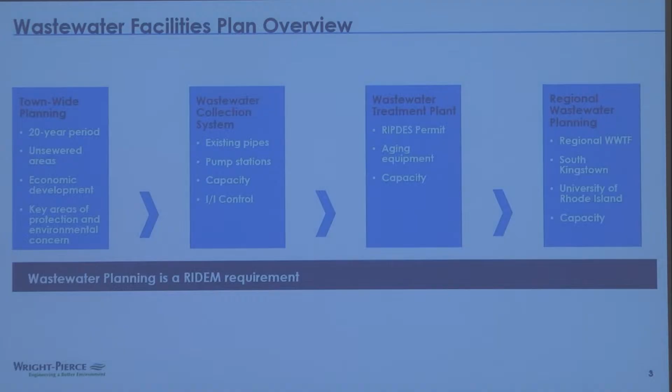The first part of the process is we look at your wastewater collection system. There are pipes, pump stations. We look at the capacity. We look at inflow and infiltration - that's water getting to your sewer system that shouldn't be, either from sump pumps and things like that, or from groundwater infiltration.

We looked at your wastewater treatment plant on Ocean Road by Scarborough Beach. That has a permit governed by Rhode Island DEM. We looked at compliance with that permit, whether the plant's ability to meet that compliance, and whether it had enough capacity for your needs now and for your needs in the future.

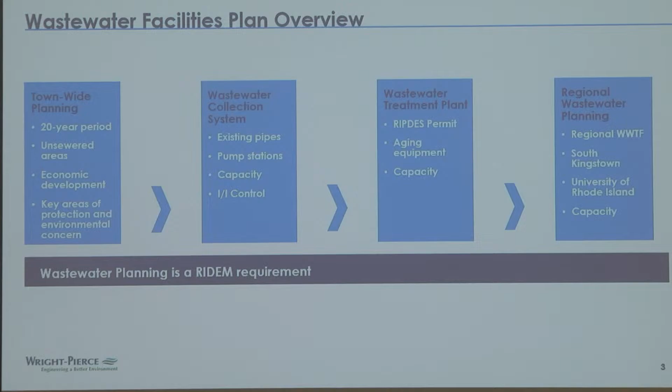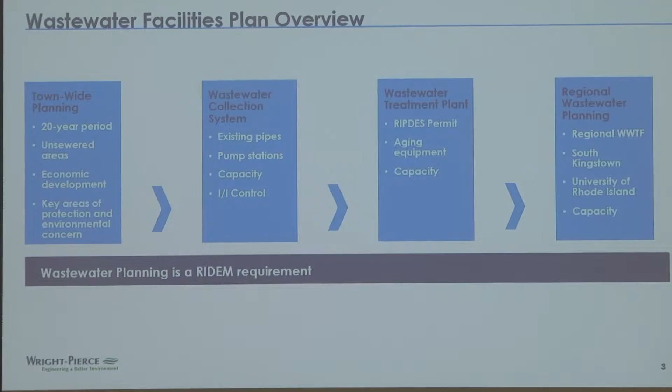And then finally, we looked at your regional wastewater plant. The regional wastewater plant is located in Narragansett, but it's owned by South Kingstown, and it's shared by 3 regional partners: Narragansett, South Kingstown, and the University of Rhode Island. So we did review the capacity of that plant.

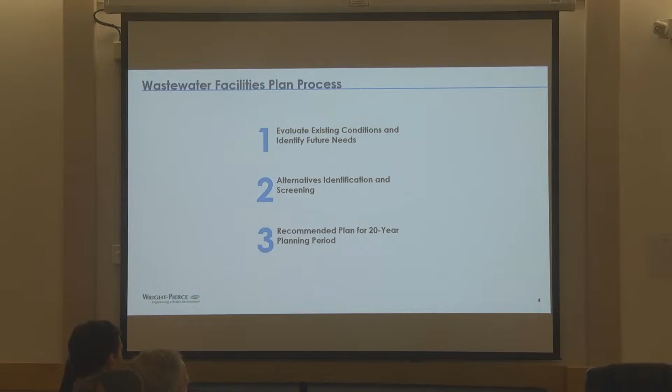The basic process here is we evaluate the existing conditions and identify your needs for the future - how much you might be okay at year 1, but you might need a certain additional capacity by year 20. We looked at alternatives to meet those needs, and then we have a recommended 20-year plan.

So first we'll look at the existing conditions. Next slide. To look at your wastewater needs.

John, before you go ahead - doing these updates, is this required by the state, or is this something we just, as a planning board or engineering, just make up?

It is required by the state. What are the ramifications if you don't do this? Well, one thing is, if you don't have projects within the facility plan, then you cannot go for any financing through RIDEM, through the infrastructure bank. That's one of the things. And it's really part of RIDEM's approach - as you bring forward different types of projects, any upgrades at the plant go through an order of approval stage with them as well. But really, it is a requirement, and there's some financial implications by not doing that.

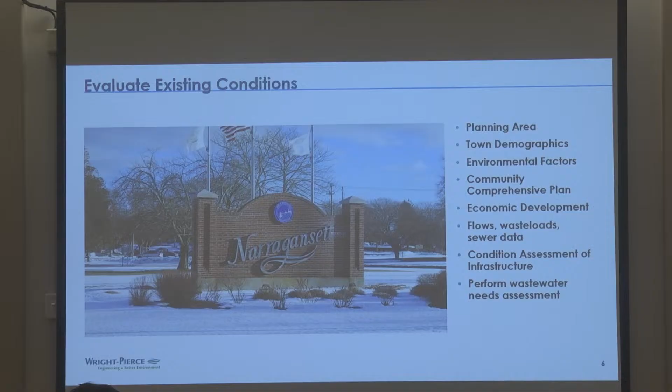And then we looked at a whole bunch of operating data from your wastewater plants - the flows coming in, the waste loads coming in - and then we projected those waste loads for the projected increase in population, for projected development in town, for the potential. Another factor in this was...

investigating the potential of expanding fish processing at the Port of Galilee. Historically, there was additional fish processing there, an economic boon to the town, and the wastewater facilities are one of the limiting factors for that industry.

That sign was from Narragansett beer. Go back 2, I think.

So the town's collection system - you actually have 2 collection systems. The north part of town flows to the regional wastewater treatment plant. There's about 14 town-owned pump stations, some additional private pump stations, 2 major sewer interceptors, and this area of town roughly coincides with your planning districts, the north and the central planning districts.

The south part of town, the collection system there flows to the Scarborough wastewater treatment plant. There's, I believe, 5 or 6 pump stations in that area. Again, 2 interceptors, and yes, all flow there goes to the Scarborough treatment plant. That system is owned completely by the town.

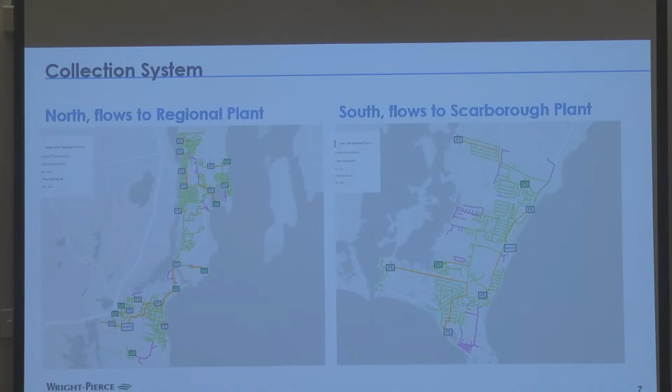I'm going to interrupt, I'm sorry to interrupt. So we keep talking about Scarborough - thinking of somebody at home, where is the regional plant located? The regional plant is on Westmoreland Street, up near Stop and Shop, behind Mariner Square. The other question is the age of the infrastructure in the north and the age of the infrastructure in the south, especially pipes.

The Scarborough treatment plant was built in 1982. The regional plant was built in the mid-70s. So John, you may be able to know a little better. Are the sewers older than that, or?

Yeah, definitely in some of the center areas of town, down near the pier, there are some older systems. There's some pipes that are probably pre-1900 down there. Not a lot. A lot of the systems were built with initial construction, then there was some work in the 40s that replaced a lot of that stuff. Then in the 80s and 90s there were major upgrades, so a lot of it's been replaced. But most of the sewer systems could be on the order of 40 or 50 years old.

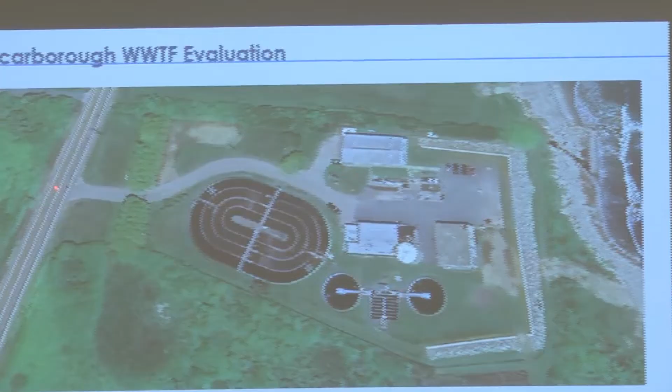And here is the Scarborough wastewater treatment plant. I'm going to walk you through the treatment process here. So flow will come from the sewer in the street. The service comes in, the sewer service to the plant flows in and goes to this area right here - this is the headworks, we call it. And this has some screening and some grit removal equipment, so we get rid of any debris or grit that's in the system before it gets to its main treatment process. Then we go to the influent pump station.

This is a lift station. This pump station will push flow up to this right here - this is the heart of your treatment process. This is an oxidation ditch. So what happens here is there are bacteria that live in this system. We call it mixed liquor, and that bacteria is what actually treats the biochemical oxygen demand that we're trying to get rid of to release clean water into the ocean. So the flow will come in here, go around these concentric rings, and that gives it enough time of treatment. Then in the middle, it flows over a little weir and then flows to these tanks right here.

These are called the secondary clarifiers. In these tanks, all the solids that have been treated settle to the bottom, and they're pumped and disposed of. The clean water flows over the top of these tanks, over a weir, and goes to this tank right here, which is your disinfection tank. Here the flow is treated with chlorine to get rid of any bacteria, and then it's actually dechlorinated before it goes out to where it's discharged out to Rhode Island Sound. Now the solids I mentioned are collected in a tank as sludge, and there's a process in this building where we dewater that sludge - basically we pull some water out of it so that a truck can come and haul the dewatered sludge away to a disposal facility.

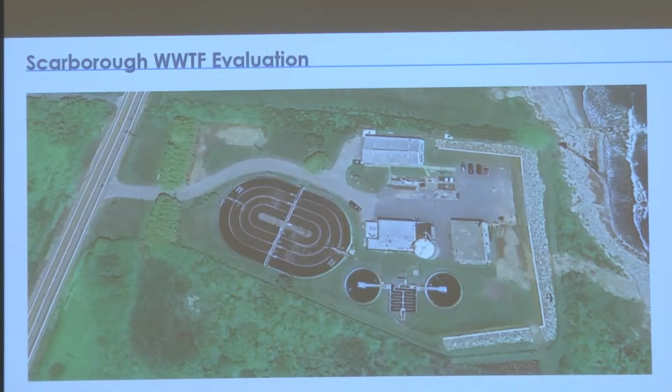Yeah, the berm was constructed, I believe, in 2017. It was constructed to elevation 20, I believe. The flood elevation at the plant, as it currently stands, is 19 or 17, and I would have to check what sea level rise is, but we are in the process of doing a resiliency plan, which is also required by DEM. The berm does protect the treatment plant sufficiently from that standpoint. So everything behind the berm is protected.

And even at that time we got the map modification, LOMR, for the area, because it's a little postage stamp carved out of the actual floodplain, and the ocean flooding area is protected by the berm there. So our insurance rates are reduced for the facility. So the berm is in place and still functional. Thank you.

In fact, another piece of that we just completed - to the right of this picture there's the outfall. There was a rock jetty constructed there called a groin, and we reconstructed and rebuilt that just this past year and a half. So that's an additional measure to provide resiliency to the plant itself.

So when we evaluated the treatment plant, again, this was built in 1982, and there have been some equipment replacement along the way. But the plant as a whole, what we found was a lot of the equipment was aging. The picture on the left is showing the pumps in the influent pump station.

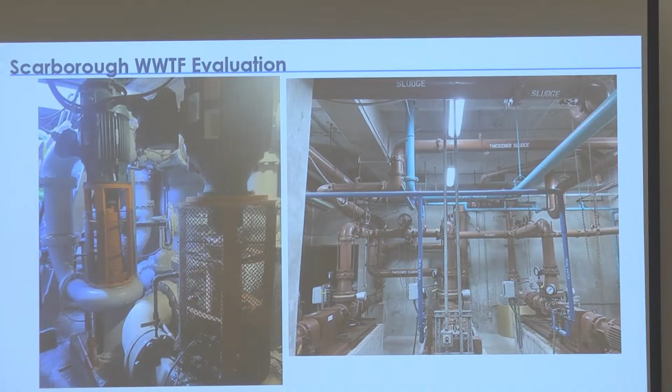The picture on the right here is showing the sludge pumps, which transfer the sludge from the treatment process to the holding tank and to the truck for disposal. Next slide.

This slide on the left shows the oxidation ditch, which is the main treatment process. You see the blue motors here. These are actually blowers and mixers, and what they do is inject air into the tank, and that air supply is critical for the bacteria to successfully treat the sewage.

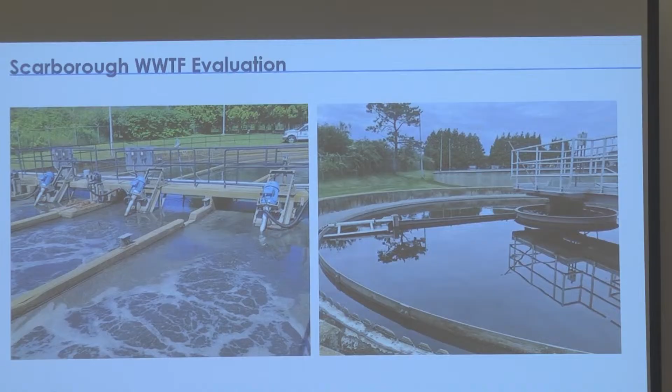On the right, we show the settling tank. This is the weir that the clean water flows over. And what we found with your treatment process is for your existing flow rates right now, this process is undersized to treat those peak summer seasons. I will say your operators work hard, and they've done, I guess, yeoman's work to keep this plant meeting what it does, but it is in need of a capacity increase, which we'll discuss more shortly.

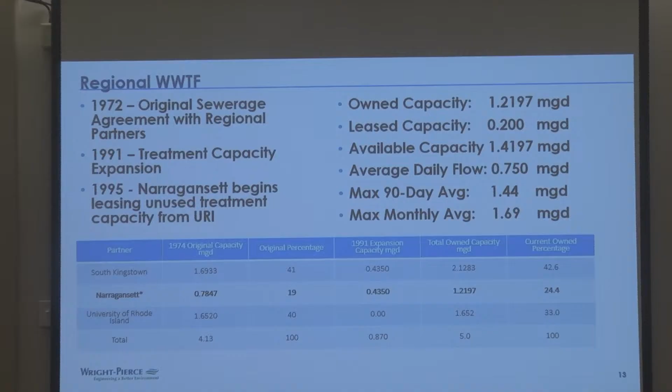All right, now the existing conditions at your regional plant, the history of your regional plant. In 1972 was the original agreement. In that original agreement, Narragansett owned 19% of the plant, which was 0.78 MGD, or million gallons per day, or 784,000 gallons per day was what they were allotted. That was not enough for the town at the time.

In 1991 was the first capacity expansion, and that was shared by South Kingstown and Narragansett. So that gave Narragansett an additional 430,000 gallons per day. So the current capacity of that plant that you own is 1.2 million gallons per day, or 24% of the plant.

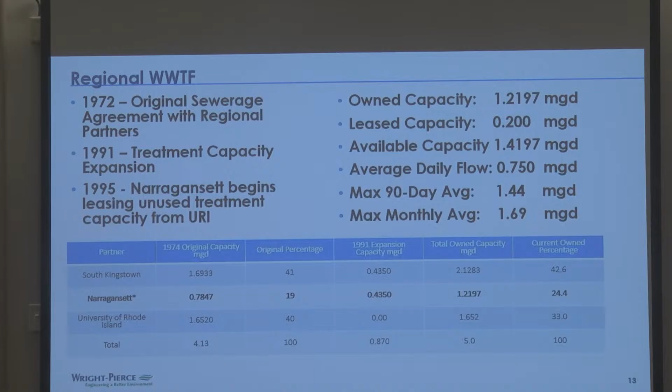In the time since then— got a question. Yeah. Hindsight is very clear, isn't it? Why did we choose 19%? It just seems like a low percentage of the entire capacity. Was it that we were saving money, they were going to pay more to build it, or do you know the politics? No, I don't have any idea.

I know that the earliest planning documents I saw date back to 1965, some McGuire engineering reports. It's just the way they divvied up and projected the flows from the areas. I've made the comments when discussing it with URI and SK that right from the get-go, we'd never had enough. Because we built the plant in '72, or the agreements were in '72, the plant came online in '78, '79, and then within 12 years, by 1990, we were already way over what we were allotted. So the planning documents just weren't accurate for whatever reason. I don't know if it was political decisions or whether the planning was limited to a specific area for some reason, or they just never expected the north end to expand as much as it had. I don't think you can blame the planning board, but I don't know.

Okay, Tom, go ahead. No, you go. So you've used the language a couple times saying that South Kingstown owns the plant, and then you just said Narragansett owns capacity. My understanding is this was authorized by a special act of the General Assembly, and who financed the construction of the plant? The capital cost of the plant was at the percentages. Shared. Was shared, right. Yes.

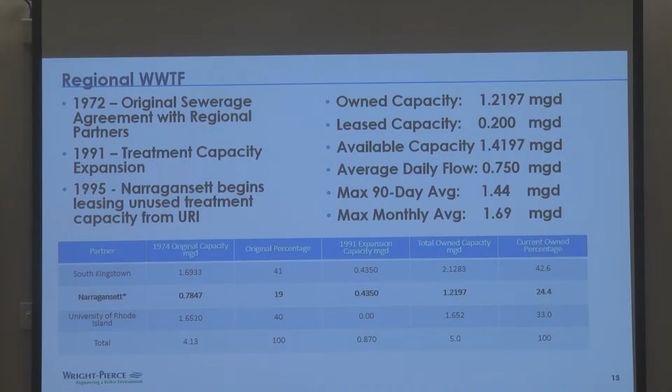There's a max day that's more, but that's a different aspect of it. That's where we're shortfalling, and the plant design and permits would all be based on that max month. It's rare that you have an average day, because it's an average—it's basically averaging a lot of up and down over the course of a period of time.

Yes. So here's the question: what do you know? Do you have a number for what the minimum 30-day flow is? I do, actually. I wrote it down if I brought the right paper here. It's well, I know it's about 60% of the average day, about 65%. So that's okay, 2/3 of that would be like point... I'm an engineer, I'm not good at math in my head, though.

0.6, something like that. In absent frozen ground and a storm, would you expect that month to be December, January? I would probably, yeah, or November or March, the cooler, drier months. Yep, I would expect December, January, just based on occupancy.

I have two questions before we leave this slide. One, in the new negotiations with the university, if they, in their strategic plan, in the back of their head, are looking to expand housing on campus, which they've talked about doing, there's nothing in the agreements to say that they can take back capacity from us. Obviously we're set for this contract, but in the new one, they could reduce our share based on their need.

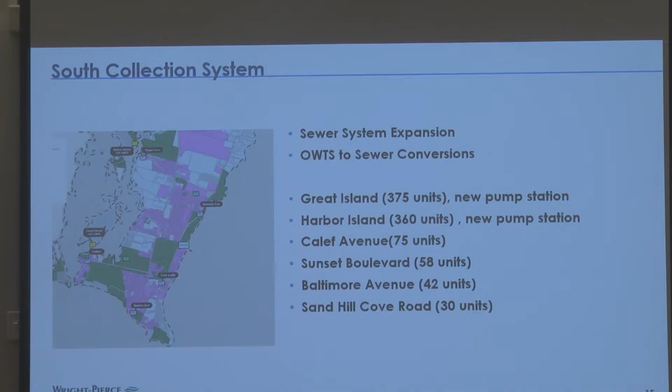So if I looked at the last plan, I think all of those areas would be on the last plan. Yes, at least I think 6 out of 7 of them were. So, which means none of them got done.

20 years. So the question I'm asking is, what's a reasonable expectation of what will get done over the course of the next 20 years because of the cost and expense associated with doing that? I guess it would depend on the pocketbook, I would assume, right? Yeah, that's what the plan will come up with.

I know the existing plan with Great Island, Harbor Island in particular, it was, well, if the residents come forward with it and we want to do it, but those things really weren't. They were areas to be sewered, but they weren't included in any of the economics and costs. Now, this plan in draft form has those costs in there, but that is ultimately the big question: where's the money going to come from, and how are we going to sequence it?

Because right now, I don't think we have an extreme amount of failing septics on either of those any more than, say, 20 years ago. So it's really a need-based decision, those types of things. It'll be a need-based decision, I think.

I guess the question I have is, does it need to be funded out of the enterprise fund, or the costs for extending sewer is borne by the area where the sewer is extended to? Generally, given the size of the financing we'll need, it would need to be a bonded project, and then that would really be funded by the people who benefit directly.

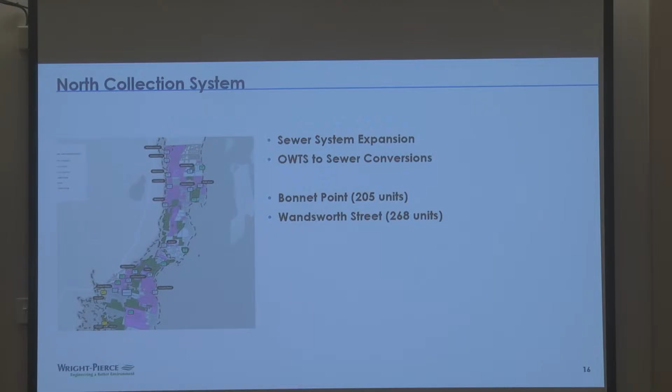So in discussions with Rhode Island DEM regarding the special area management plans for the Narrow River, there are certain guidelines on where sewer extensions can be done, and some limitations when transferring water from one basin to another. The feedback from DEM is they would actually look favorably upon sewer extensions in that area, mainly because of nitrogen loading to the estuary, and it would alleviate that and promote the health of the estuary and water quality of Narrow River and the salt pond.

I've got a general question. In recent years, the state legislature has adopted ordinances for building and zoning that really changed the focus for local communities and the demand for capacity. Did you consider any of the new legislation in all of this? Yes, we did.

We initially looked at the build-out analysis in your community's comprehensive plan, looking at what the plans were from the 2016 plan, and then we re-looked at it with the new regulations and how things like ADUs and substandard lots would affect the potential needs for development and the flows from development.

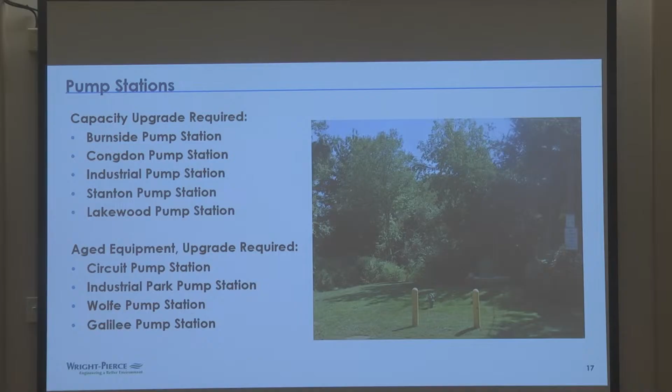Is it the resiliency plan that's included in the appendices here? Yeah, that's the draft plan, and a lot of the implementation and evaluation of what measures to include, or cost-benefit wise what doesn't make sense to do, is still being worked out. Like we said, if the whole service area is flooded and the pump station is flooded, you've got time to come back and there's a different type of recovery, whereas if the pump station's at the bottom of a hill and everyone up there will come back to their house after the evacuation order is lifted, that one needs to be hardened a little better.

So the resiliency plan is essentially incomplete. There's some additional information that's going to be added. It's in draft format as initially submitted to DEM, but we've had comments back and we have to revise that as well. There will be other recommendations as to what to implement, but that hasn't been completed yet.

Yeah, so again these are going along at a parallel track. I can see people at home wondering, do we have contingencies to stop backflow if we ever get to a point where the pump station starts to get overwhelmed, so we mitigate what's going back into people's homes? Fluids are going to go where they're going to go. Generally it will come out the manhole before it comes out into somebody's house, but in lower lying areas, some houses have been equipped with a backwater valve, but some haven't. It's hit or miss in terms of where they're located.

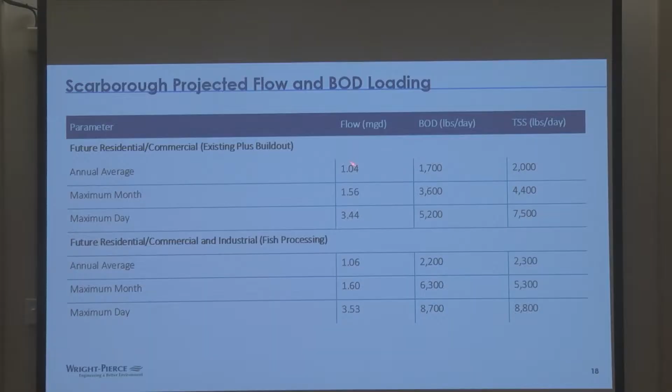Next slide. So the Scarborough treatment plant - this shows the projected flows and loadings, waste load. The annual average for existing and future residential and commercial needs is right around 1 MGD. The maximum month is 1.6 MGD, and then peak flows on the wettest days reach 3.4 MGD. This number, BOD, is biochemical oxygen demand, and has to do with the strength of the wastewater coming in.

One piece of this that we looked at was the potential for providing wastewater service for the fishing industry at the Port of Galilee. We spoke with Town Dock and some of the others, Seafreeze, and reviewed what their needs were to bring some of that fish processing back, because right now they do more limited fish processing - any wastewater they collect, they truck elsewhere, and they've moved their processing facilities elsewhere in general. What you'll notice in this first column is the flow is pretty much the same; the real issue with the fishing industry is this one right here - it provides a much higher strength wastewater to the plant. So designing for that higher loading from the industry was one piece of this that we looked at.

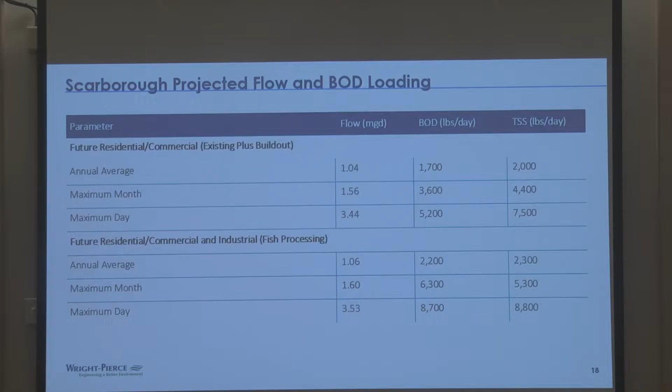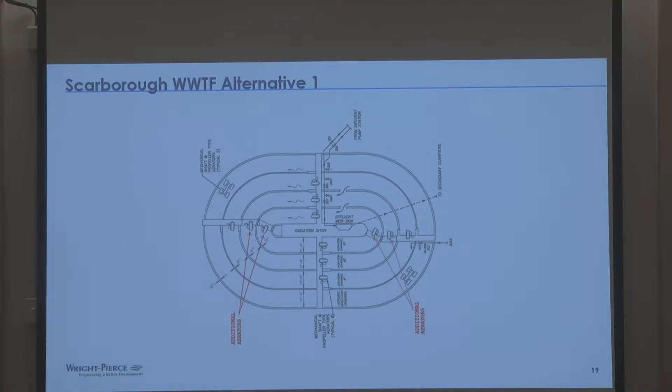Another alternative we looked at, we'll go through this quickly, is adding primary settling tanks. So rather than going straight to the oxidation ditch, you would go from the influent pump station to primary settling tanks. This would remove about 30% of the solids before it gets there. This performed similar to revamping the existing oxidation ditch, but for a lot more money, so we moved on. We can go to the next slide.

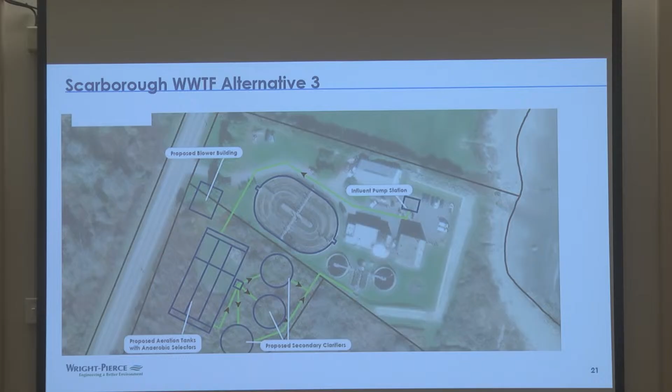Alternative 3 would be to replace the oxidation ditch with a conventional aerated activated sludge wastewater system. This would be a treatment system similar, not exactly like, but similar to what's at the regional plant. The way this would work is from the influent pump station, rather than the oxidation ditch, we would replace it with aeration tanks.

There would be 3 tanks: 2 would be required for the flow and wastewater needs generated by the town, and an additional tank would allow capacity to serve the projected needs of the port. So these would be 3 aeration tanks replacing the oxidation ditch, 3 clarifiers replacing the 2 clarifiers, and then you would go to the chlorine contact tank and back out.

This land is owned by the town. This building here would house the electrical equipment and the blowers. Rather than having those jet aerators on top, this system would have diffusers in the bottom of the tank, and the blowers in this building would send air through the bottom. These tanks are much deeper, and they allow a much higher treatment capacity. You can see the footprint here is almost the same as this, but it's just a much more efficient use of space in getting that treatment.

This land was once owned by the town, but at some point became part of the development here.

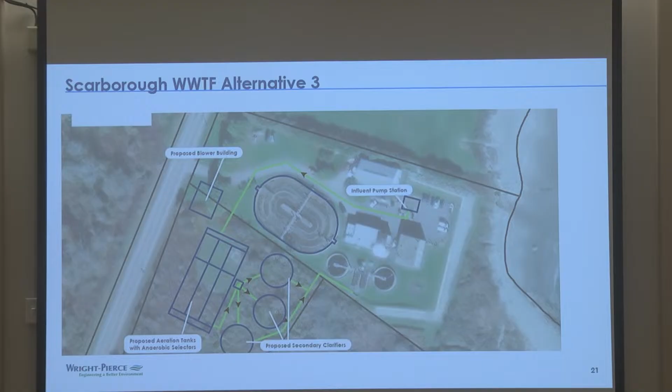So is this higher land, is it less susceptible to a coastal storm then? There would be options to do that. You could extend this berm, but what we more typically do, since you're building the concrete tanks anyway, is build those tanks to the elevation of the berm, so the berm could potentially be extended if needed, but that's unlikely. You would build those tanks to elevation 20. Essentially it's all above grade from there anyway. You see the lower part of the picture, the berm ends there, and that blends into the other elevations which are higher. But we would be required to build these structures higher to begin with too, because the backside is probably falling into some other flood zone.

Back to that berm—I asked you about it earlier, and I think you said it was built to a height of 17 feet? I believe it was finished in 2017, because all of the paperwork and documentation was completed, and map changes were done by the time I was here in 2019.

I didn't build anything along the ocean, but a fellow who's a very successful engineer built a little further north. What he did was research the surge through all the great hurricanes. I believe 1938 was the worst, with a 22 foot surge, and he built to a height of 24 for that reason. We discussed this here, but never the height of the berm when it was constructed. In any case, it will protect against most storms, but that's 5 feet lower than the big one, and that could do a heck of a lot of damage to the sewer treatment plant.

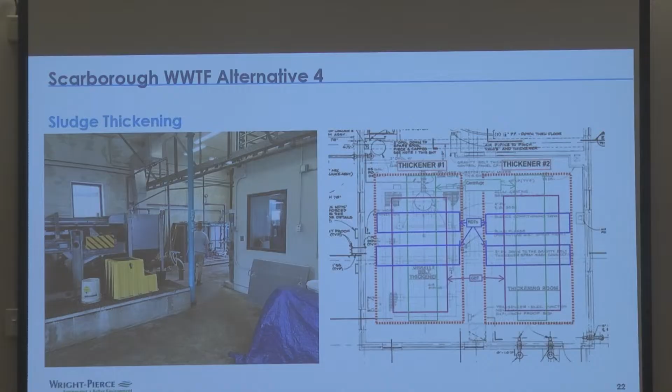Next slide. So alternative 4, this is kind of like when you go to Panera Bread and get to pick two. You pick one of 1, 2, and 3, and then one of 4 and 5. This option is to handle the solids. When you treat wastewater, you take solids out and need to do something with them. The two options are to thicken them and truck them away as liquid sludge, or dewater them and haul it away as sludge cake or solids. One gets hauled in a tanker, one in a roll-off. Right now, the plant does sludge thickening, so a tanker truck hauls away liquid sludge, which currently gets disposed at the incinerator in Woonsocket.

Sludge disposal is one of the biggest regional problems facing the wastewater industry. On top of that, the current disposal facility in Woonsocket is planning to no longer accept liquid sludge - in the future they'll only accept sludge cake. One option here is to continue sludge thickening, replacing the gravity belt thickener with two units side by side. This building was originally designed with space for two, which would provide the redundancy you need.

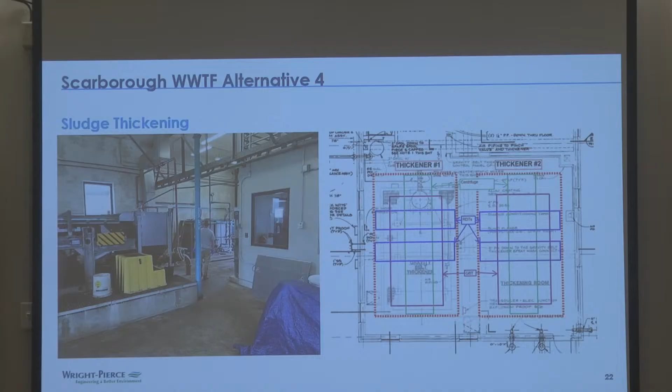Given the state of the disposal options, dewatering is a little bit more expensive, but would give the town more security going forward in their disposal needs.

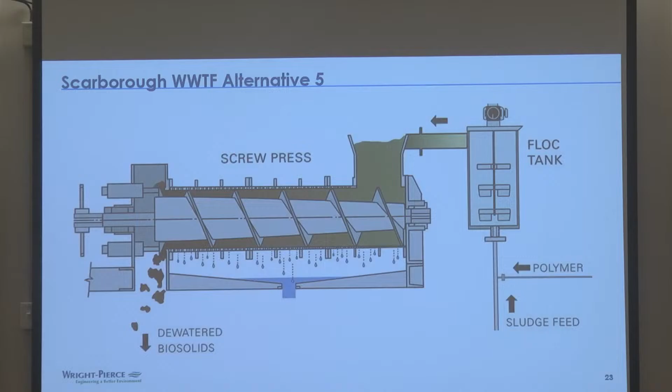Question: the ongoing cost of hauling - it sounds like traditional liquid sludge disposal is really going away as far as finding receptors to take it to, or at least you're minimizing where you can go. Yes, there are fewer options for the solids. So you're either hauling further distances, or the few left in the market are charging more, or both. My question then becomes - you're not going to totally offset your cost, but comparing the cost to haul and dispose of dewatered sludge versus the investment, can you get a 10% return on that investment?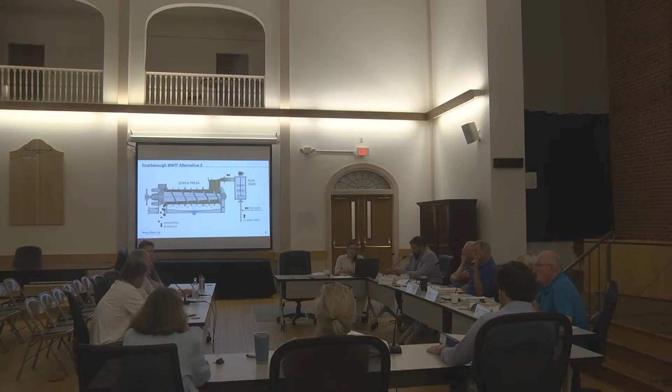I don't have the numbers on that off the top of my head, but it should be something that should be considered. Yes, and in addition, when you're hauling solid sludge cake, the number of trucks you need is significantly less, so your transportation costs will plummet. Okay, thank you.

Next slide. So this summarizes the needs at the plant. One thing I didn't mention - we'll go through this quick - the oxidation ditch would be repurposed as sludge storage and an aerobic sludge digester. This would be your new treatment plant. The old secondary clarifiers could also be additional sludge storage if needed. And when I say sludge, this is before you've thickened or dewatered it.

But the one thing I didn't mention at the beginning is, in addition to the needs to meet the new flows, there's a whole bunch of what we call baseline improvements that just need to be done for the age and condition of the equipment. Wastewater plants are a harsh operating environment for mechanical equipment, so the influent pump station, the disinfection system - that stuff is all going to need attention in the next 20-year planning period.

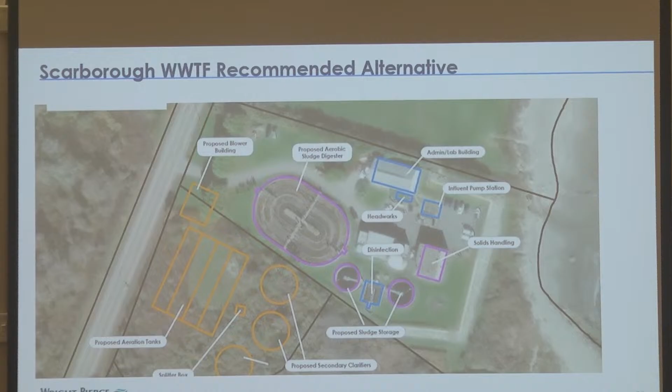So, question in the comp plan, and this seems out of context, but it's in the comp plan: evaluate the feasibility of reusing gray water from the Scarborough wastewater treatment facilities. Is there feasibility of reusing it, or is that part of it?

I don't know if they looked at it how carefully, but the only feasible location I think would be the country club, Point Judith. Any other places, there's really not the ability to land apply the effluent. We'd probably need to improve or increase the treatment quality on the effluent. Like, for example, Jamestown treatment plant, they take their gray water and run it through a process before they send it over to the golf course there. So that would have to be added.

That would be in addition to any improvements noted here. And trying to locate that equipment, we'd have to do that as well. Maybe the comp plan, maybe we got it from Jamestown, I don't know, Doc will remember. And they only do a portion of what they have, whatever they do.

Just curious, and I'm not looking for hard numbers, but theoretically is that huge numbers to do something like that, to create that capacity for the gray water? I'm just thinking about reducing the disposal and getting a benefit for both the community and for the operation of the facility. Obviously if it's huge dollars, but if it's small... and if you don't have an answer, just say you don't have an answer.

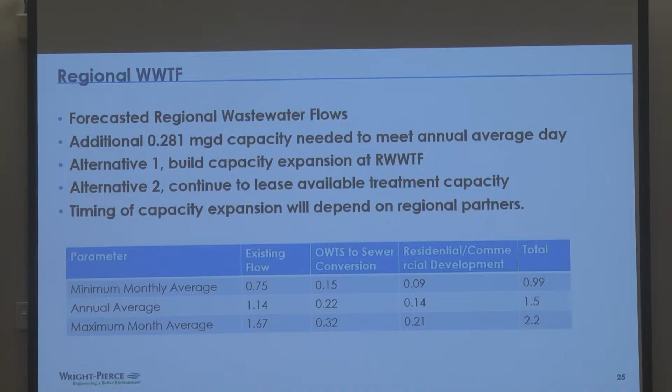So you need about 1 million gallons in round numbers. Let me ask a question that I'm sure people are asking at home: okay, we're planning this for Narragansett, and the assumption would be that South Kingstown is doing the same study or will be doing the same study. They are, yes. Is there communication at some point with both parties to say this is what the new plant needs to look like, or the new upgrades need to look like?

Yeah, that communication will occur. In fact, when we complete this exercise and we have comments from DEM, we're going to update our plan and submit that back to DEM, and we'll get that off to South Kingstown, my counterpart over there, so they can get a look at our plan to see where it's at. And then, ultimately, that's what their facilities plan will do. We'll come up with what these upgrades need to be.

We did not evaluate the loadings to the extent that they did for the seafood processing, obviously, or for the existing conditions. That's what South Kingstown would handle, they'd have that portion of the data. And again, we will have to pay some portion of that through our operating costs, because it's just a normal cost of doing business there. But their plan will evaluate it, and there'll be a back and forth on that.

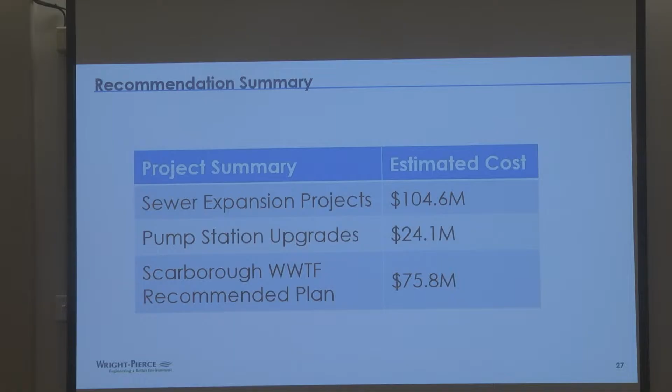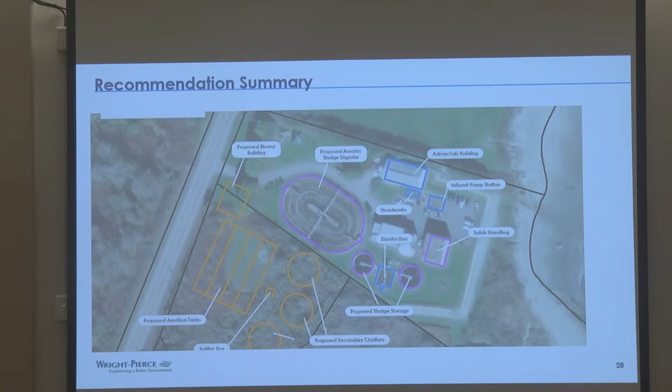So that's this, just the plant again. We've been through sort of the whole system. The next slide has Ryan's and my contact information. So here's a summary, I think we've sort of been through it.

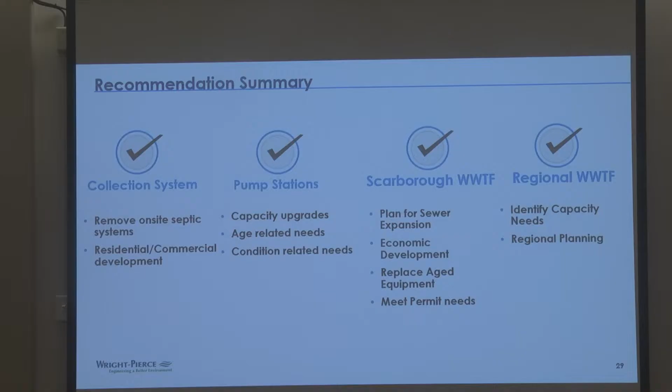There we go, there's the contact info. Now, the piece that is not here, that I always scream about, and this is the biggest piece, it's the elephant in the room, but the reality is if you can't get the effluent there - we have sewer pipes that are 40 years old. Those aren't 8-inch pipes anymore. You just look at the sludge buildup on a sewer pipe, and that's not even figured in here, upgrading our sewer pipes or even coming through and regenerating them.

That's not part of this. We did not include any rehab of - I just want to clarify for people what the scope of the work actually was. We were looking at basically the capacity of the pipe. The existing pipes, we looked at whether they could handle the additional flows we're projecting, and the pump stations as well. We did not include any costs for addressing I&I at this point, or any identified sewer collapses. I didn't expect that, I knew that generally the sewer pipes we're looking at have like 80 years of lifetime left for a lot of these pipes, so there's some life still left in a lot of the infrastructure.